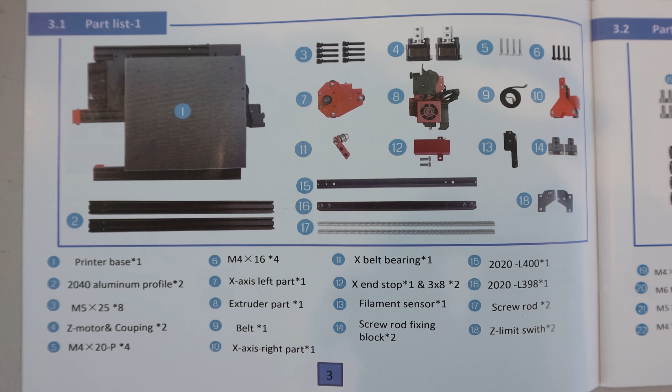There are a lot of parts, so I'm not going to go through them all, since they're listed in the instruction manual and clearly marked with numbers. For example, this is the printer base, the aluminum profiles, Z-motors, and so on. The only parts that are not labeled are the tools, like the spatula, SD card reader, cables, and Allen wrenches.

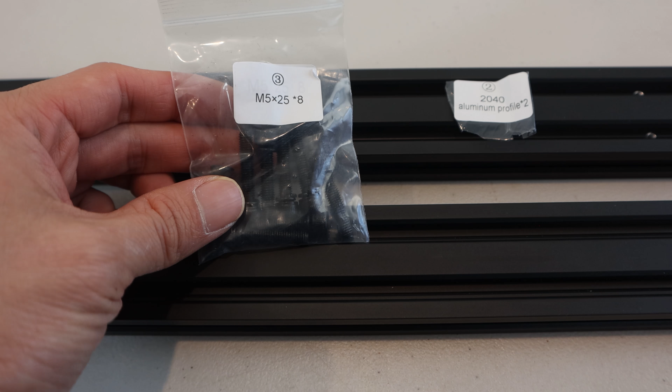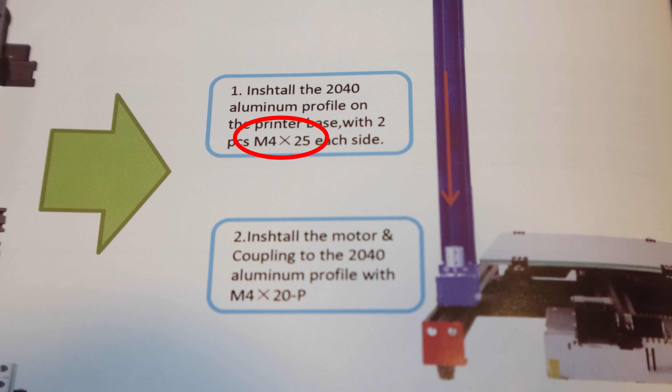To start assembly, begin with parts 1 through 5, these here, plus the printer base. First, take part 2, the 2 aluminum profiles, and 4 of the M5x25 screws in the bag marked 3. Note that the manual here has a typo that lists the screws as M4x25. However, M5 is the correct one.

These aluminum bars will be your Z-axis guides, and take note that there are 2 threaded holes towards one end of the bars. The bars also have 2 threaded holes at both end faces. We'll be attaching the guides here on either side of the printer base, like so. Make sure to keep the 2 threaded holes at the bottom.

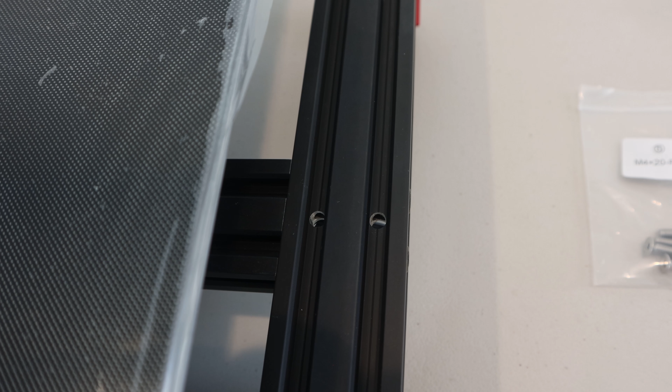The bars will line up with the 2 holes in the rail on the bottom here, and we'll be attaching them with the M5 screws from the bottom. Again, note that the 2 threaded holes on the face are towards the bottom side of the guides when installing.

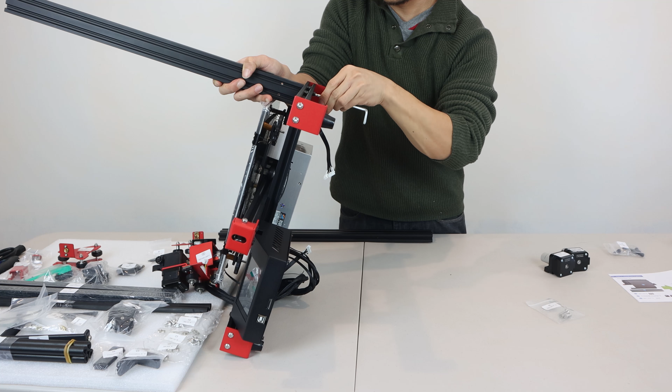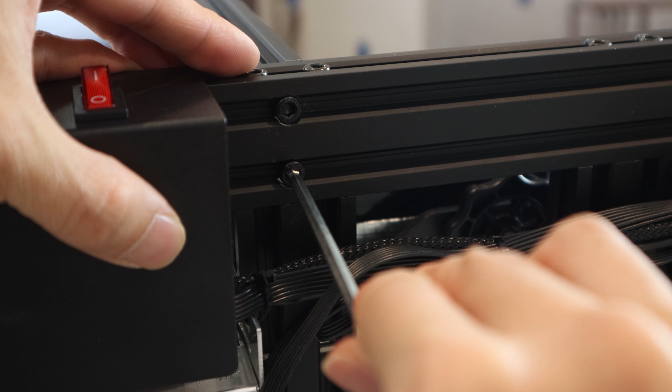You may find it easier to lift or turn the printer on its side in order to fully tighten the screws, using one of the included Allen wrenches. All the Allen keys that you'll need for installation are included with the unit, and we'll do the same thing on the other side.

Next, take the 2 Z-axis motors with couplings and 4 M4x20 screws from the bag marked 5. We'll be attaching the screws through the holes on either side of the motors, and using the holes on the Z-axis guides, but on the back side, so make sure you don't attach them to the front. This is why we needed the Z-axis guides with the threaded holes at the bottom. Do the same on both sides. When you're done, it should look like this.

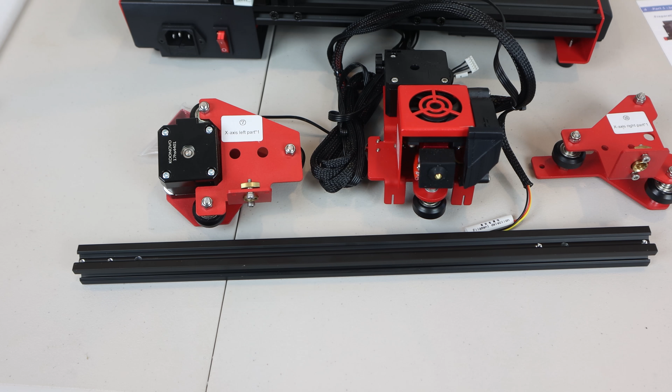For the next step, find the X-axis guide bar marked 15. One side has a pair of threaded holes about 3 inches from the end and right at the tip, and the other side has 3 evenly spaced holes. On the back, you'll see that one hole on the right and one hole on the left has a larger cutout around it. That's so it can accommodate the bolt head on the X-axis brackets, and they'll fit together like so.

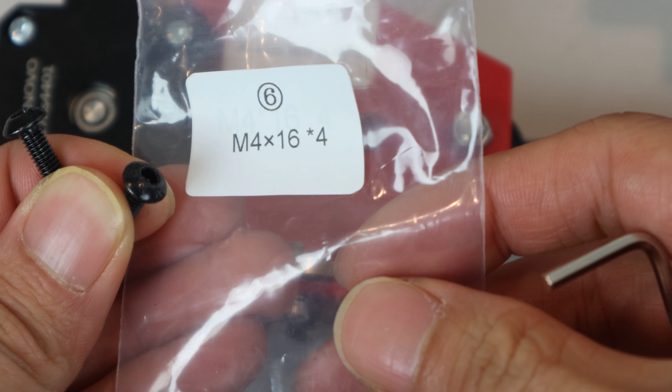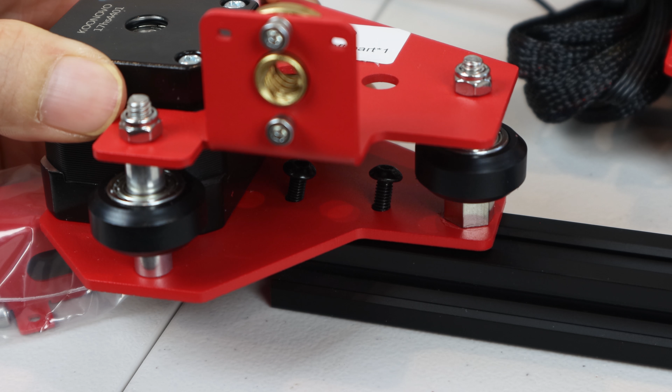We'll be using 2 M4x16 screws from the bag marked 6, and they'll go in the holes here. After lining them up with the holes in the X-axis bar, go ahead and stick the Allen wrench through the hole at the top of the bracket so you can tighten them. Now, lay the X-axis guide with the wheels on the bracket facing up.

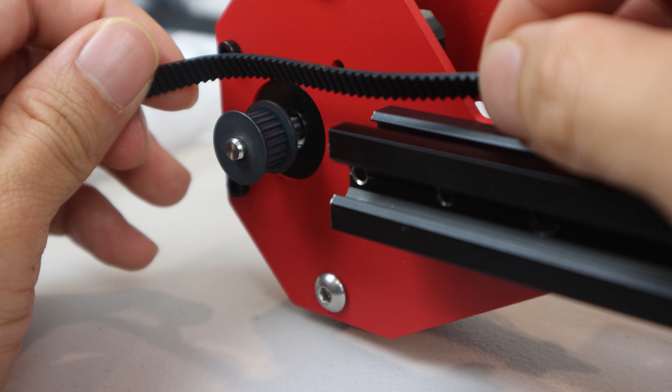Next, take the belt in the bag marked 9, and note that it has a smooth side and a toothed side. We're going to lay it in the channel on the X-axis smooth side up, teeth on the bottom. This is so the teeth will be able to grab the gears on the bracket you just installed.

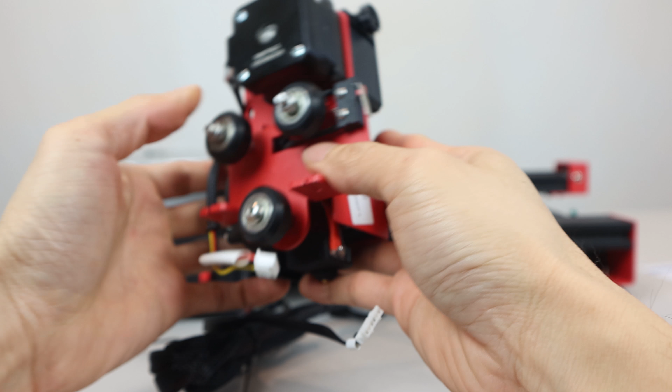Now, holding the X-axis with the motor bracket to your right, pick up the X-axis motor attached to the printer base, and hold it with the wheels facing you. Place the first wheel of the motor into the track on the guide where you laid the belt, with the belt extended out. Then slide the motor over the guide into the tracks on the top and bottom. It should roll smoothly on.

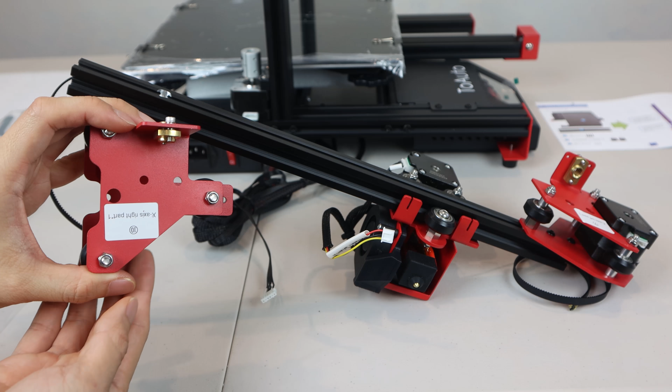Now take the X bracket marked 10 and line up the head of this bolt with the cutout on the bar. We'll use these 2 holes to attach it, again with the M4x16 screws marked 6. Then tighten through the access hole on top.

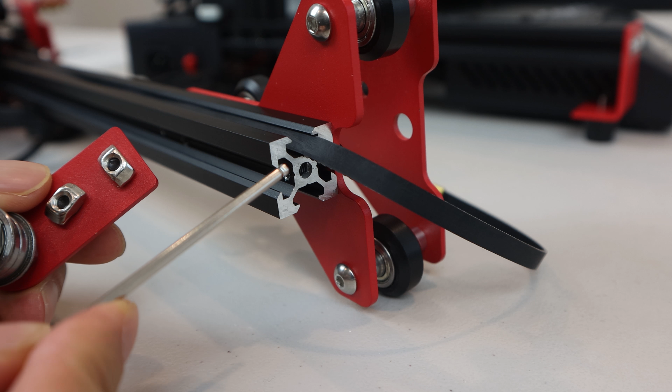Okay, so I'm going to turn this assembly around, and we're going to attach the belt bearing marked 11 at the end of the guide. The 2 pre-installed screws here have a special T-slot nut on the back that will grip the inside of the guide bar channels. You'll want to slightly loosen these nuts first. Notice that the nuts are shaped to fit inside the channel on the guides. You can align them vertically or horizontally, and either way they'll slide into the channel.

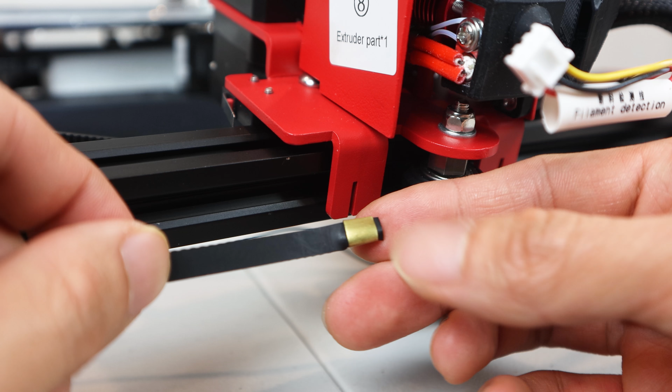Now loosely tighten the screws so that the bearing still has a little bit of play to move in or out. Next, we'll take the two loose ends of the belt and secure them to the X-axis motor. What you want to do is slide the belt into the slot on the bracket so that the metal clip at the end holds it in place. You'll go under the bracket and through the slot like so.

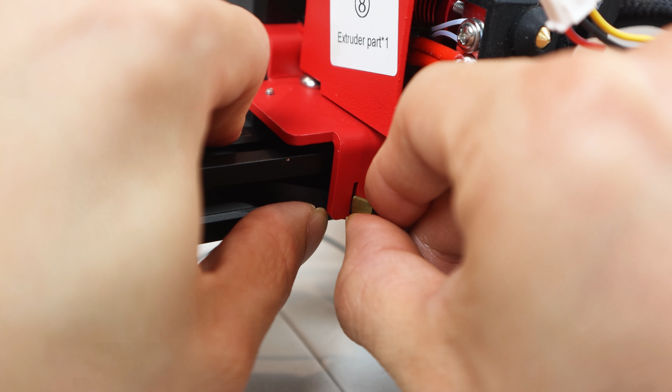Make sure the belt is placed over the gear pulley at the end. Then do the same on the other side, sliding the belt into the slot on the X-axis motor's bracket. Now if the belt seems loose, move the belt bearing out to ensure that there is some tension on the belt, but not so much that the belt feels stretched. Then tighten the nuts to secure the bearing in place.

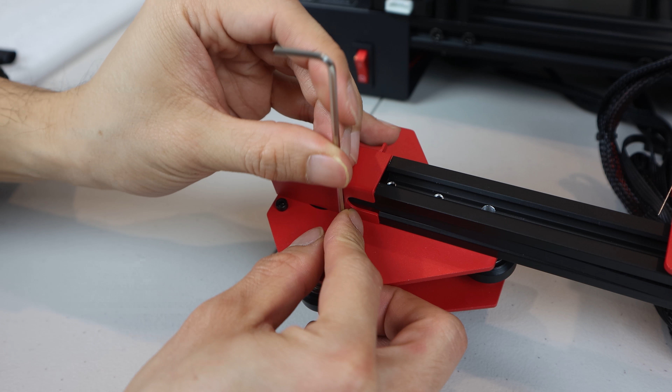Next, take the part labeled 12, the end stop cover, and its two included screws. Attach them over the geared bearing on the left bracket. For this next part, you may need to carefully snip the zip tie holding together the bundle of cords connecting the base to the X-axis motor. Be careful not to cut any of the wires.

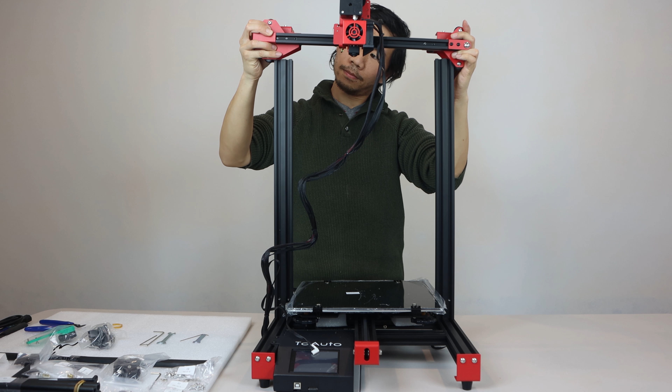Now take the X-axis guide bar assembly, and with the motor facing the front of the printer, place the brackets over the Z-axis guide bars. Line up the wheels with the tracks and firmly press down. The bar should roll smoothly down the rails. Make sure when you do this, the wires end up at the back of the machine.

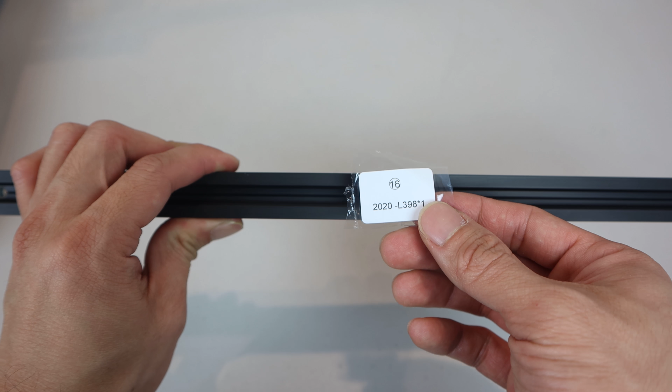Now, find the top bar labeled 16 and the remaining 4 M5x25 screws marked 3. You'll want the side of the bar with the larger drill outs for the threaded holes on top. This bar will be attached to the top of the Z-axis guides.

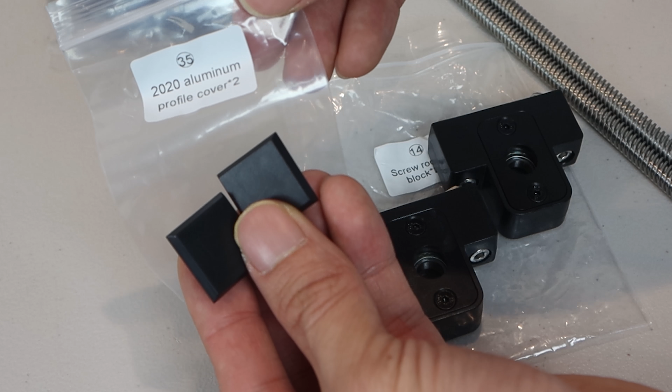Part 17 are the ball screws, which are 2 long threaded rods. You'll also need Part 14, the fixing brackets, which each have 2 T-nuts, Part 35, plastic end caps, and Part 18, the Z-limit stop switches. Note that the stop switches have the T-nuts on opposite sides, since one goes on the left-hand side and the other goes on the right-hand side.

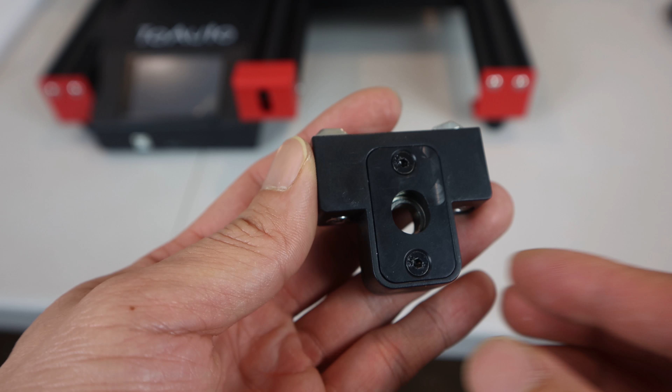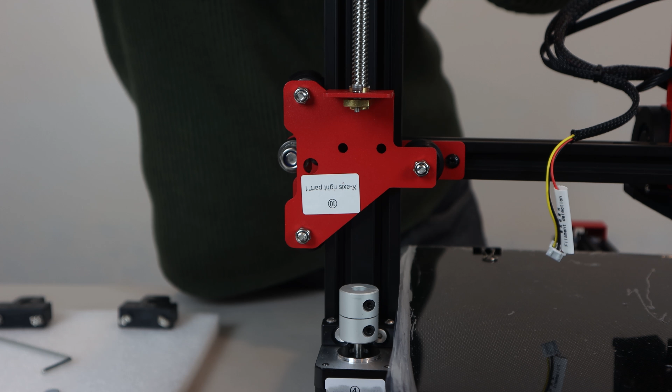The fixing brackets also have a top side with 2 screws visible, and a bottom side, which has these 2 square openings. I'm going to turn the unit around so you can see what I'm doing, since we'll be working on the back side. Thread the ball screws into the red brackets on the X-axis guide by turning clockwise. Then continue to screw them down into the coupling on the Z motor about ½ an inch or until it doesn't go in anymore. Then tighten the nuts on the coupling.

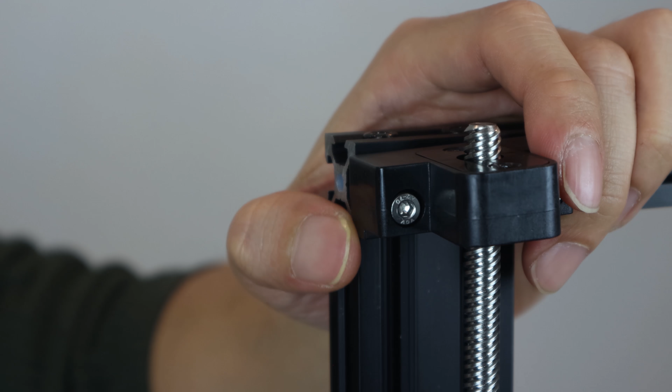If you're having trouble getting the ball screw into the coupling, loosen the top screw on the coupling first and try again. Then do the same on the other side. At the top, place the fixing bracket over the ball screw. Then slide the T-nuts into the channel on the guide horizontally before tightening the screws and securing them in place. The T-nuts should rotate and lock in vertically as you tighten.

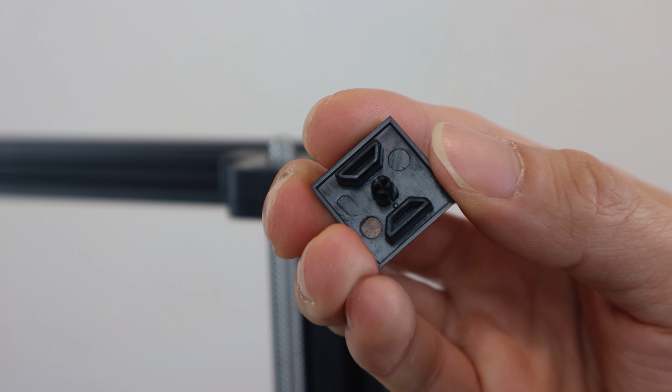Next, take the end caps and install them at the ends of the top bar. It doesn't really matter in which orientation they're installed. With the Z limit switch, note that the T-nuts are on the shiny side of the plastic. These will slide in vertically on the Z-axis guides, and the switch should face the front of the unit opposite the side the motor is on. Then tighten the screws and do the same on the other side.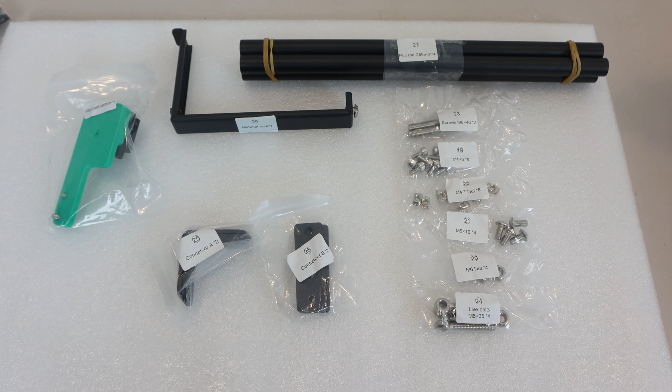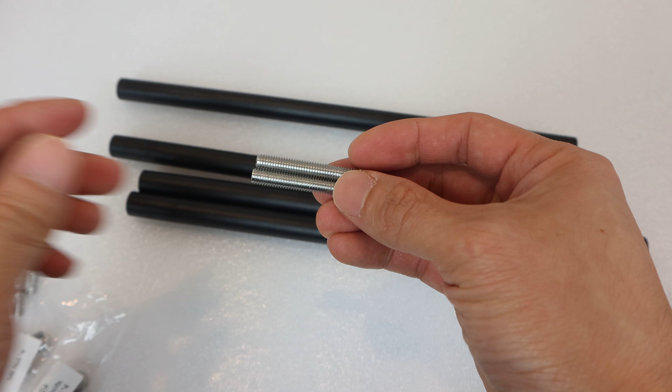For the last part of the assembly, you'll need all the remaining pieces. We'll start with the 4 pull rods marked 27. These rods are threaded at both ends, and we'll need the 2 headless M6x40 bolts marked 23. Choose any rod and screw in a bolt at one end about halfway. Then take a second rod and thread it onto the same bolt so you end up with one long rod. Do this again with the remaining 2 rods.

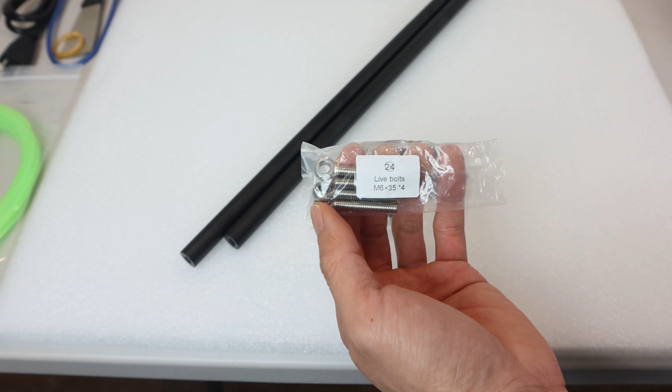Now take the 4 M6x35 eye bolts labeled 24 and the 4 M6 hex nuts labeled 20, and thread one nut onto each eye bolt, stopping about a ½ inch or 1 centimeter from the eye. Thread one bolt into the holes at both ends of each pull rod. You'll want to make sure that you've left enough room at the ends of these bolts. If necessary, you may need to take them out a bit.

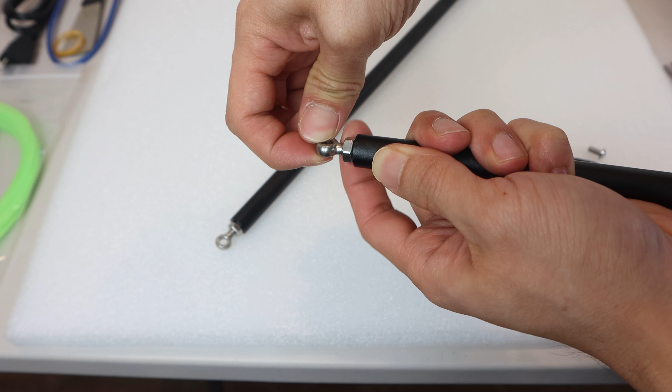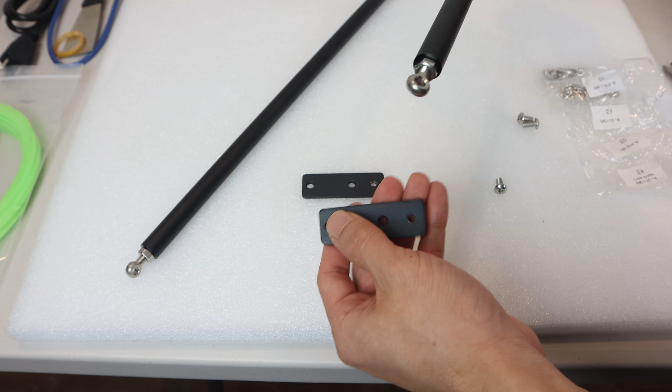Next, take the flat brackets marked 26, connector B, and note that there are 3 holes, a single hole at one end and a pair of holes closer together at the other. We're going to use the part labeled 21, M5x10 screws, to attach the bracket through the eye to the outer hole in the 2 that are close together. Then attach the second bracket to the other rod in the same manner.

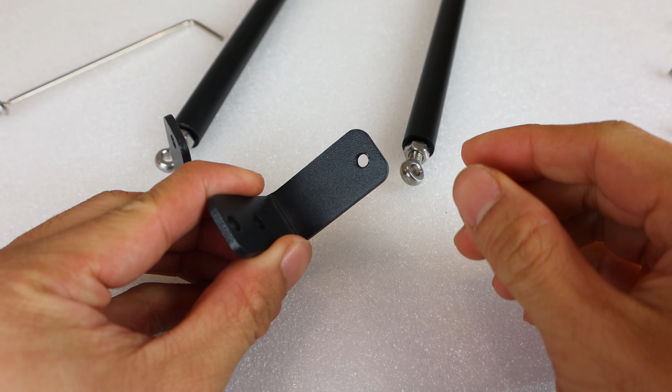On the opposite ends of the rod, we'll be attaching part 25, connector A, which has 2 holes on one side and a single hole on the other. The outside of the single hole will be attached to the eye bolt using the M5 screw.

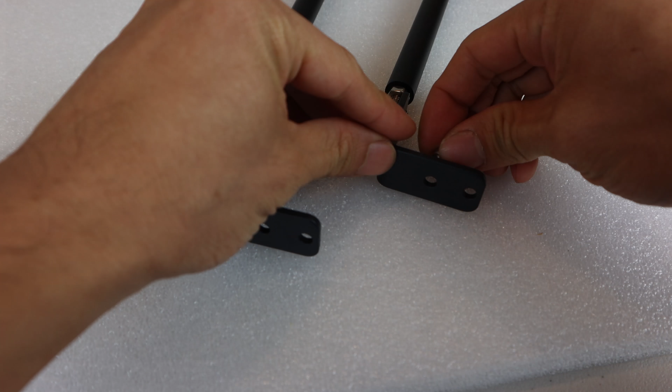Next, we'll need the M4x8 screws labeled 19 and the M4 T-nuts labeled 22. And we'll be attaching 2 each to all 4 brackets. Make sure all the screws are on the same side, and the T-nuts will be attached on the reverse side with the grippy side facing down. On the L brackets connector A, the nuts go on the outside.

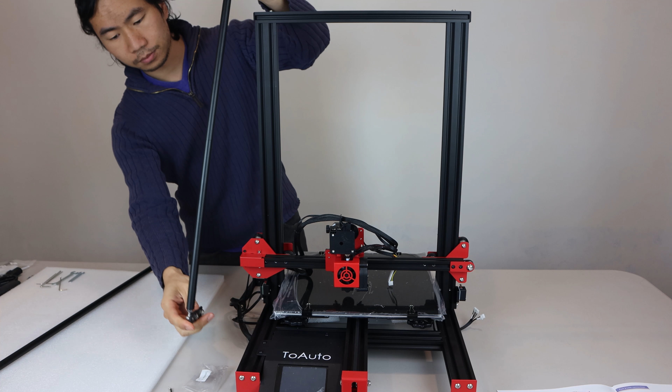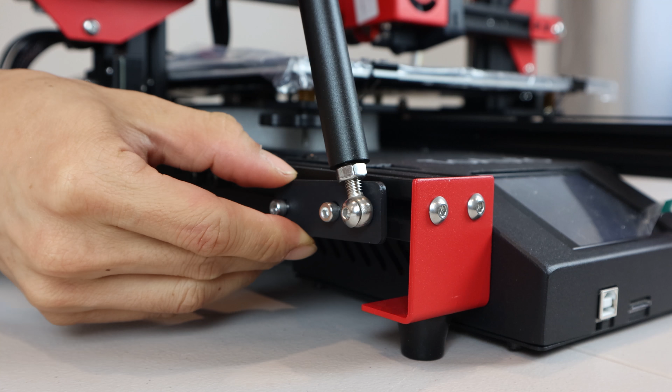Now, position the pull rods with the flat bracket at the bottom facing out and the L bracket on top facing in. If the brackets don't reach the guide bars, loosen the eye bolts to increase the length. Then fix the screws on the bottom with the T-nuts inside the rail track and the bracket all the way to the front of the unit.

At the top, fix the L bracket with the T-nuts inside the rail along the face of the top bar. Orient them horizontally to get them to slide inside the track. Again, they should turn vertical as you tighten, but if they don't, you can give them a nudge with a small Allen wrench. Then do the same on the other side.

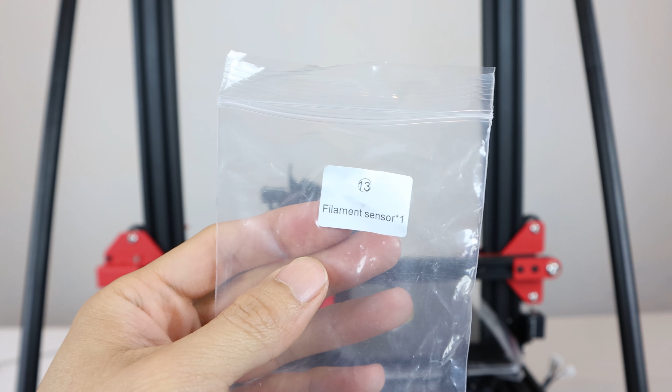Now take the material rack, part 36, with the T-nut and screw pre-installed, and set it into the track on the top rail, and tighten the screw to secure it in place. Next, we'll install the filament sensor, part 13, which will be installed with the arrow pointing down and the 2 screws pre-installed at the bottom. It'll attach here to the X-axis motor.

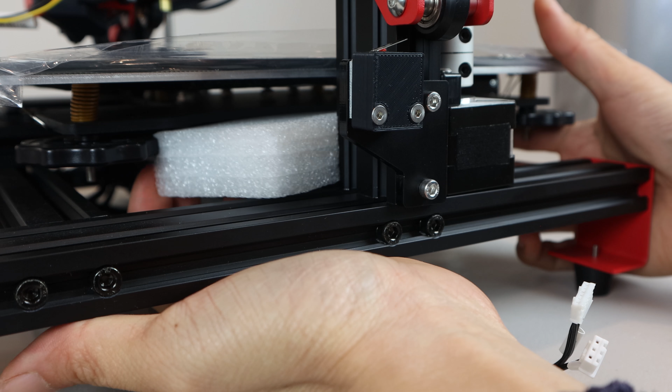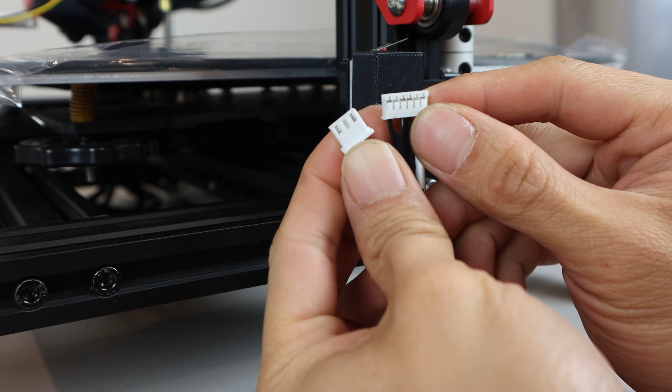If you haven't already, remove the styrofoam cushion under the heat bed. Then, locate the power connector cables on the sides. Note that there are 2 connectors, a narrow one and a wide one, both marked Z. The smaller one will connect on the bottom of the Z limit switch, with the 2 catches facing the outside. The wider connector connects to the left-hand side of the Z-axis motor.

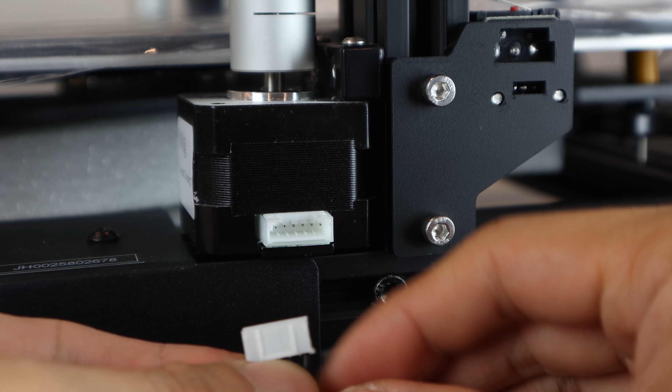So if the connector doesn't reach, you can separate the cables to give it more length. The ridges on this connector will face up when being plugged into the slot on the side of the motor. On the other side, the Z-axis motor connector is easier to access since it's on the outside, and the small Z connector goes into the bottom of the switch on this side.

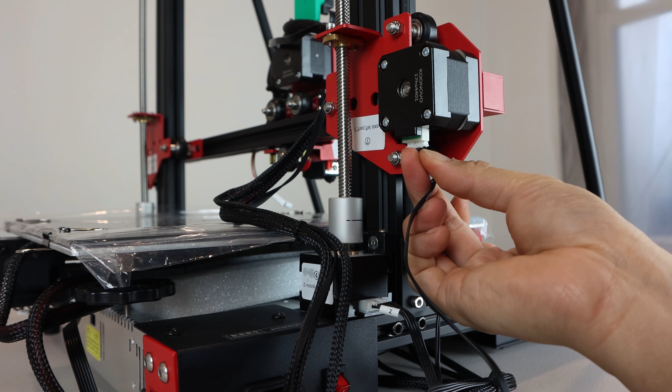The power cable marked X will attach to the bottom of the X-axis motor towards the back, and the connector marked filament detection goes into the connector on the side of the sensor. Don't forget to remove the foam pad under the bed on this side too.

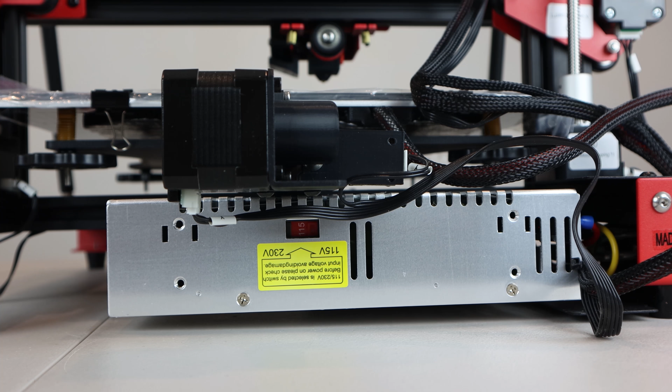On the back of the unit, the power supply has a switch here marked with a yellow sticker for you to select your region's supply voltage by sliding this tab. In the US, set this to 115 volts. Lastly, we'll remove the plastic film on the LCD screen and the glass plate. To do this, remove the binder clips, but don't discard them because you'll need those to reattach the plate afterward.

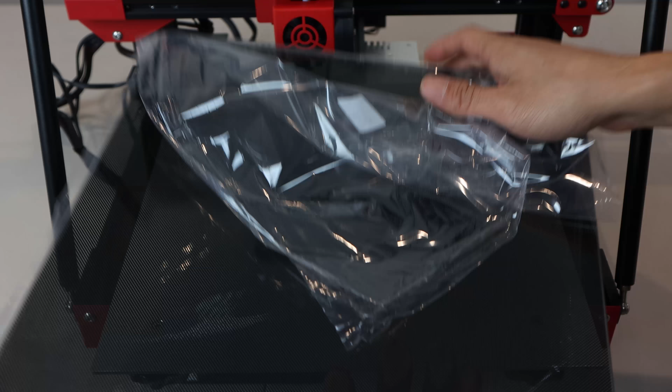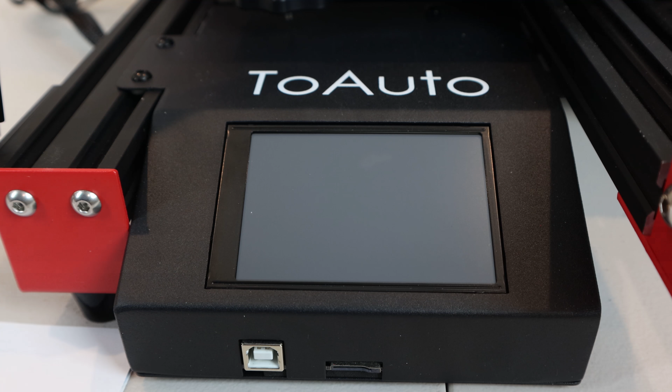Now we can plug in the power cable and switch the printer on. You'll see a boot screen on the LCD, then a menu. But before we print anything, let's check out the bundled software on the included SD card, which you'll find plugged into this USB card reader.

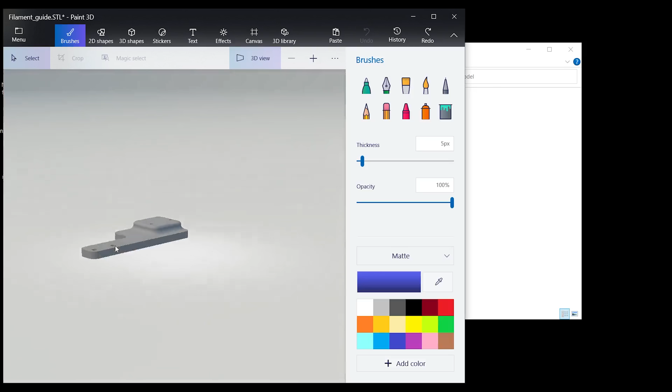Pop that into a computer or laptop, and here's where you'll find Cura, a free 3D modeling and printing software, video instructions for assembly, bed leveling, and included parts, though these are technically for the previous printer model. The model folder has some 3D design files, including several replacement parts for the printer itself, like the filament sensor bracket, and 2 G-code files which provide direct instructions for the 3D printer to make a print.

You can go ahead and install the Cura software, but note that it's version 4.2, and if you want the latest version, you'll need to download it from Ultimaker's website for free, which is what I'll be doing. While it's installing, I'm going to connect the printer to my computer using the included USB-B cable.

After launching the software, there's a few setup prompts and Cloud Account login, which we'll skip for now. Then choose Add a non-networked printer, and in the list here, near the top, just under Ultimaker, select Custom and Custom FFF Printer. I'll name it Pyramid A1.1.

Then in the settings, use the values provided in the manual, 310 for X, 310 for Y, and 400 for Z. I'm also going to check Heated Bed. Then check the Extruder tab and enter 0.4 for nozzle size and 1.75 millimeters for material diameter.

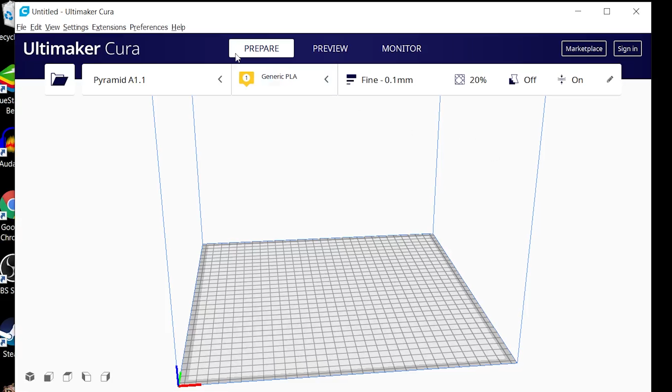Then click Next. From here, go to the Preferences menu and choose Configure Cura. Select Profiles from the menu on the left, and then Fine from the listed profiles. Then go to the Import tab, and on the SD card, go to the Profile folder, and select the profile provided. Here, it's ELF 4.2.1. Click Open, and you should get a successful pop-up.

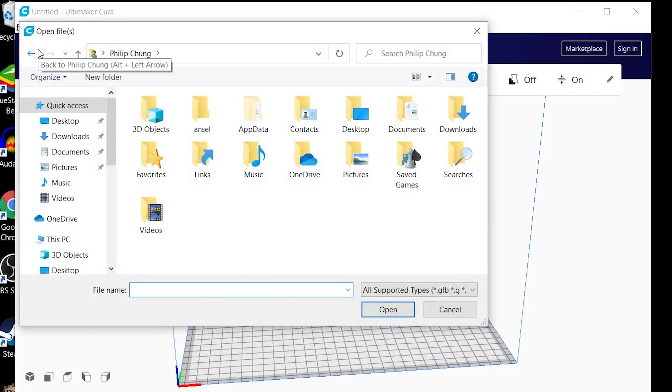Click OK. Then choose the new profile from the Custom Profiles list, click the Rename tab, and change it to Pyramid 2.1. Click OK, then close the menu. Now the software should be set up to send prints to your 3D printer. But before we do that, let's load up the filament and level the print bed.

First, take your filament and snip the tip at a 45-degree angle so that you get a point. This will allow it to feed into the extruder more easily. We'll hang the filament roll on the material rack. I like to load my filament with the X-axis motor centered. So on the LCD screen, I'll select Leveling, then Point 5, which will move the extruder to the middle of the bed.

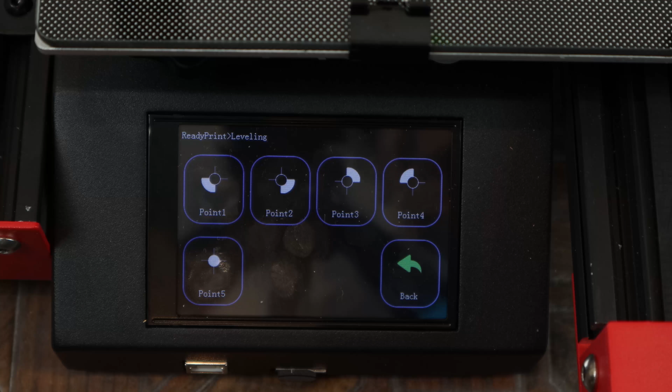Then I go to the Move menu, set the increment to 10 millimeters, and move the Z-axis up 20 millimeters. And that just gives you a bit of space under the extruder for material to come out. Then insert the filament into the sensor, and feed it down into the extruder. You'll want to use the thumb handle to pull out the side in order to get the filament down past

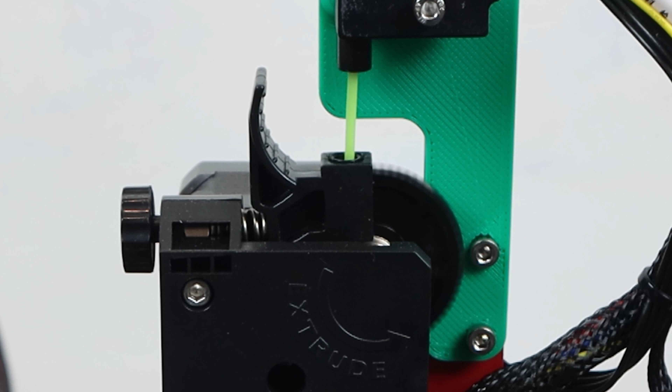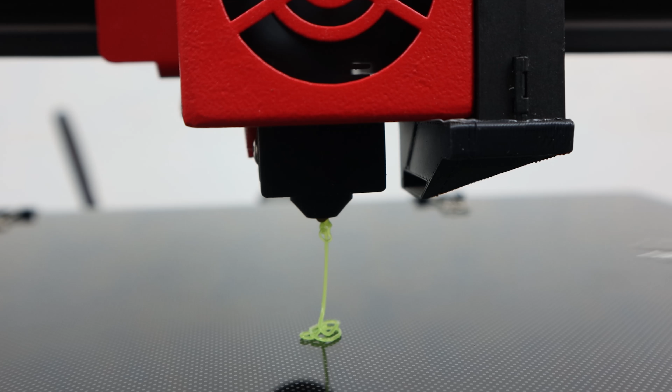the silver gear. Then on the LCD screen, go into Settings, then Filament, then tap Load, then Confirm. If your extruder is preheated already, it will load right away. Otherwise, you'll have to wait till it heats up first. But when it's done, the filament will be pulled into the extruder, and some will squeeze out the bottom. So you should remove that before you start printing.

To level the bed, press Leveling on the main menu, then select point 1, which will move the nozzle to the front left corner. Then you'll want to turn the adjustment wheel under this corner to lift or lower the bed, clockwise to raise it, counterclockwise to lower it.

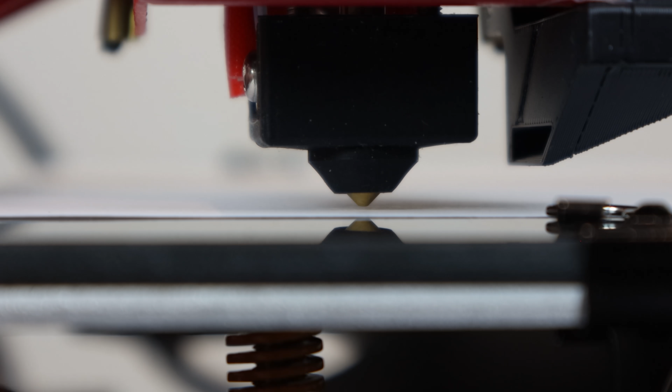Using a sheet of printer paper, you want to adjust the bed height so that the nozzle, at point 1, just touches the paper. So here, I'm going to raise it a bit. And if I slide the piece of paper, I can get it under the nozzle, but also feel that the paper is scraping up against it without getting stuck. Then move on to point 2 and do the same.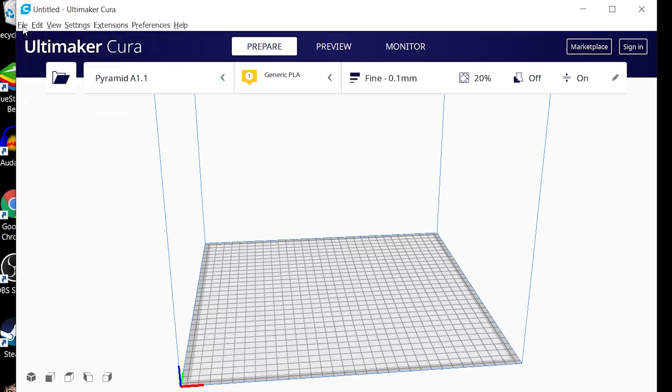Repeat this process for all 5 points, 1 in each corner and in the center of the bed. If the center point isn't right after leveling, repeat the process for the 4 corners until the paper slides freely under the center point. Okay, now we're ready to load up a 3D model to print. I've got one downloaded here for a custom board game piece for Candyland, since we lost one of ours.

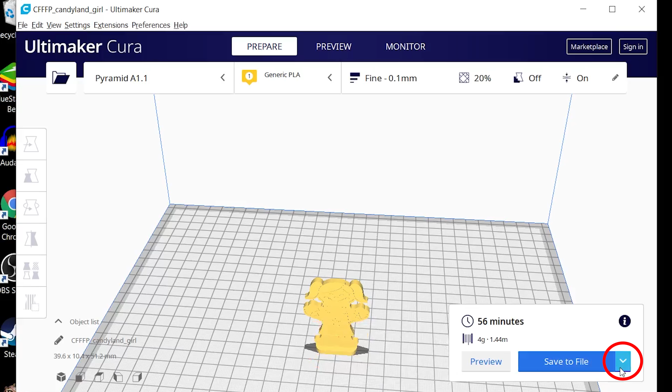And to print it, just click on Slice in the bottom right-hand corner, and you can save the model to the SD card as a G-code file and print it directly from the 3D printer, or click the arrow here and print via USB, which we're going to try now. It'll estimate how long the print will take and how much filament you'll need by weight and length. So that's 4 grams, or about 1.5 meters of filament, and it'll take about an hour to complete.

So now we click Print, and the heat bed will start to preheat. And you can see that there isn't a temperature set yet for the extruder, which preheats automatically after the heat bed comes up to temperature. And once that's done, the printer will start printing automatically. Alright, there it goes.

Now you can hear the fan running for the power supply. It's about as loud as a computer fan running with full processing power. But the motor noises for the printer are pretty minimal. This print will take about an hour, so we'll check back in a little bit.

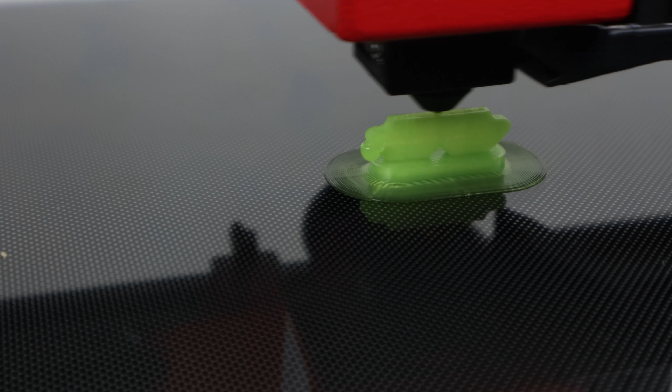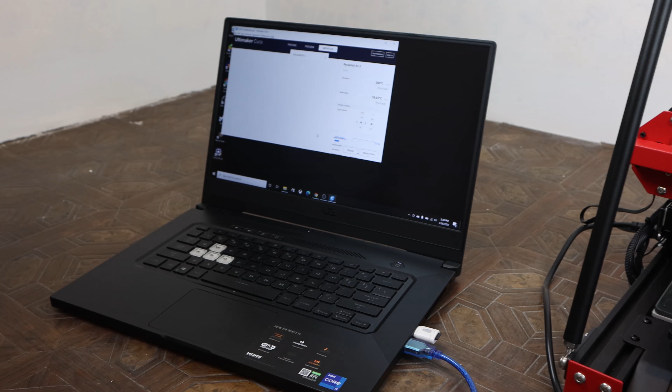Alright, so I forgot that my laptop goes to sleep after 15 minutes. And if you're printing via USB, it's imperative that your computer stay on, otherwise the print will stop, and the hot nozzle will melt part of your print if it stays in one spot too long. Luckily, it wasn't stopped for too long, and once I woke the computer back up, it resumed printing. But if you want to avoid this problem, make sure to disable sleep mode on your computer or laptop. Or you can also print directly on the printer using a G-code file loaded to the SD card.

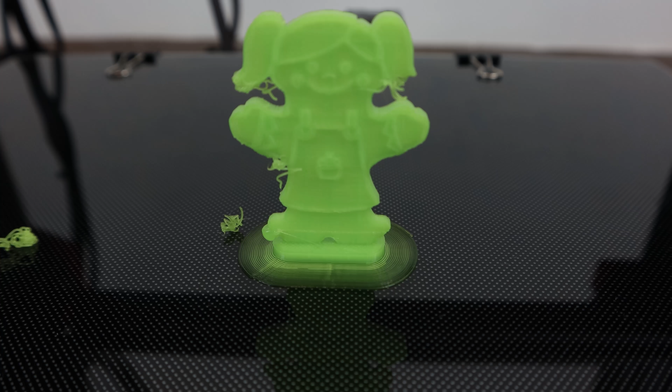This is the completed Candyland piece, and as you can see, it's not perfect. There are a couple hairy strands that came loose, and you can see that it's mostly at the end of the ponytails here on the figure. And this actually has more to do with the design of the model than it does the performance of the printer, since these 2 spots called overhangs aren't supported by any structure beneath them. It's a notoriously tricky thing for 3D printers to get right.

Also, you can see the melted blob where my print had stopped for a few minutes, and it seems to have skipped a layer when it resumed. So the structure there might be a little weak. The lesson here is, don't let your printer get interrupted by sleep mode.

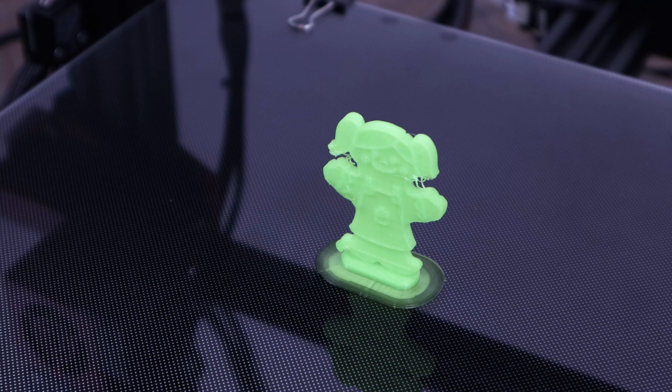You might also have a little trouble getting your print unstuck from the heat bed after it has cooled down. That's where the included metal scraper comes in handy. You can use it to gently wedge up around the edges to release your print without damaging it. And I'd say the print isn't half bad considering.

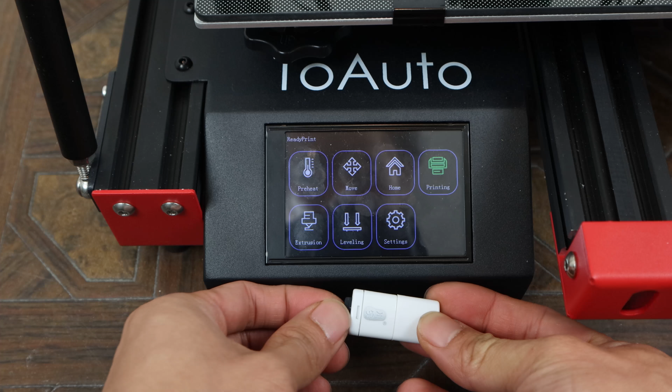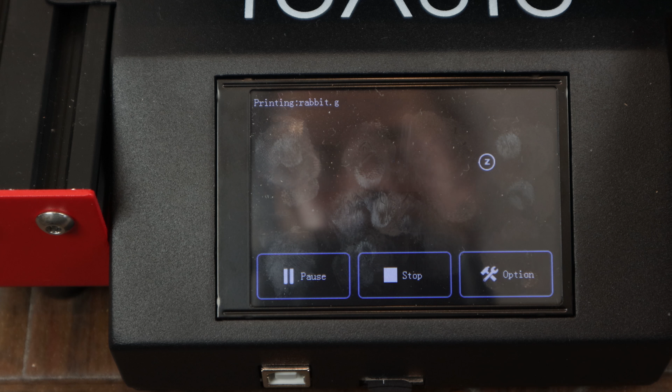Let's try out one of the included print files on the SD card. Insert the SD card into the slot just below the LCD, then select Printing. Go to the Model folder, and we'll try out the rabbit model that's there. After preheating the bed and extruder, the print fires up right away. You can also choose to preheat these in advance using the Preheat menu. Just remember that all temperatures are in Celsius.

Occasionally, while printing, you may hear the printer vibrate as the print head moves back and forth quickly. While this could affect print quality if severe, I didn't find that it had any impact on this particular print. If you're concerned about it, you can dial down the speed of the print in the options to avoid some of the quick, sudden movements that cause vibration. Just note that your print will take longer to complete.

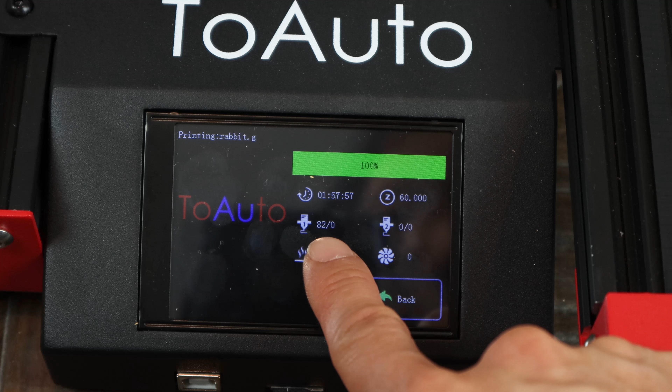When the print is done, the bed will move towards the back of the machine automatically. You can see here that the print took about 2 hours to complete. As tempting as it may be to remove your print right away, you should wait about 10 minutes for the bed to cool down to room temperature before you attempt to detach your print from the bed.

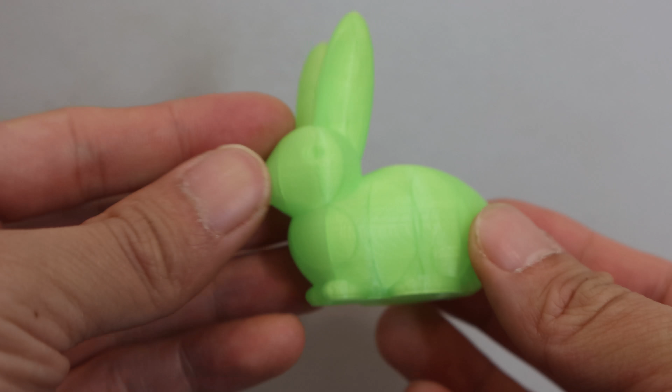You can see that there's a bit of stringiness towards the end of the print where the extruder had to move over the gap between the ears, but it's not too bad and these extra strands and bumps can be removed by trimming or sanding. Upon close inspection, the print overall is very good. It has nice smooth transitions with zero ringing or ghosting. Here we see a tiny bit of extra material, but that can be trimmed.

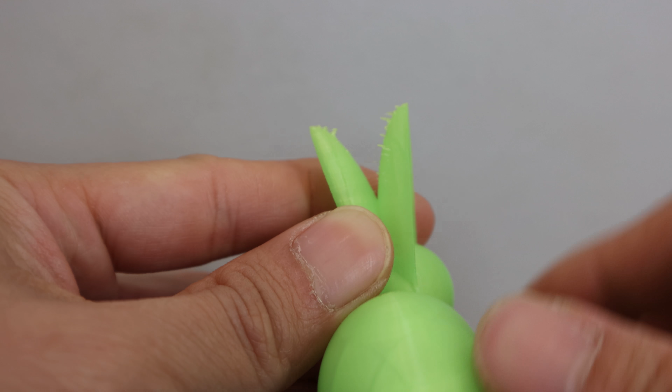And you can see the adhesion of the print towards the back lifted just slightly, but that doesn't seem to have had a big impact on the overall print structure. And despite the occasional vibrations I saw during printing, it doesn't seem to have manifested as flaws in the print, so I'm pretty happy about that.

After printing, you'll want to unload your filament by going into the same menus as you did when loading. Then carefully pull the filament out of the extruder once it's been backed out of the nozzle. Be careful not to pull out the collet in the extruder, which tends to pop out during filament removal. You can just press that back into place. Always remember to store your unused filament in an airtight plastic bag to keep it from absorbing too much moisture, which could negatively impact your print quality and filament performance.

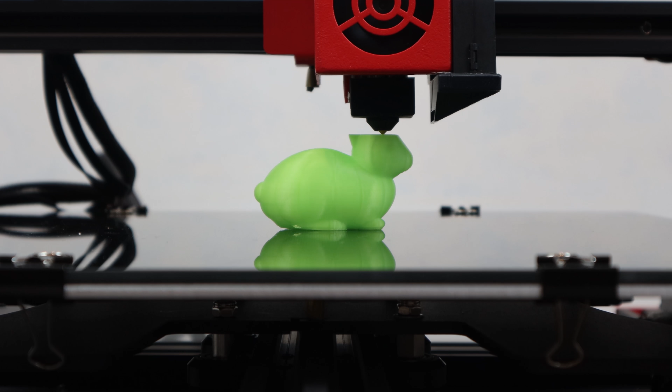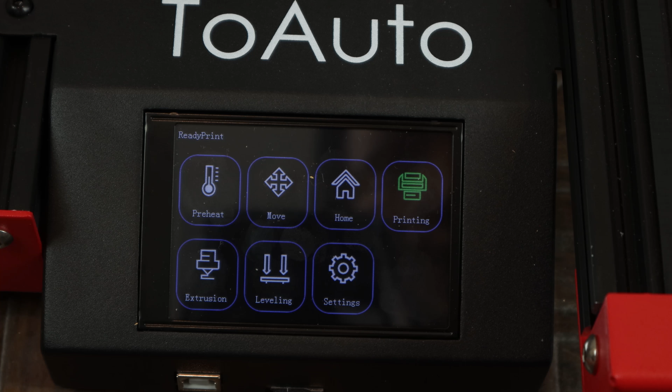Overall, I'm pretty happy with this printer. It was easy and straightforward to assemble, works well with the bundled software, and the prints are fast, clean, and accurate, as long as the model file you're using is designed well. The menu interface is very simple to use and understand, but doesn't have a lot of advanced features or settings, which makes this unit a really good one for beginners to learn the basics of 3D printing.